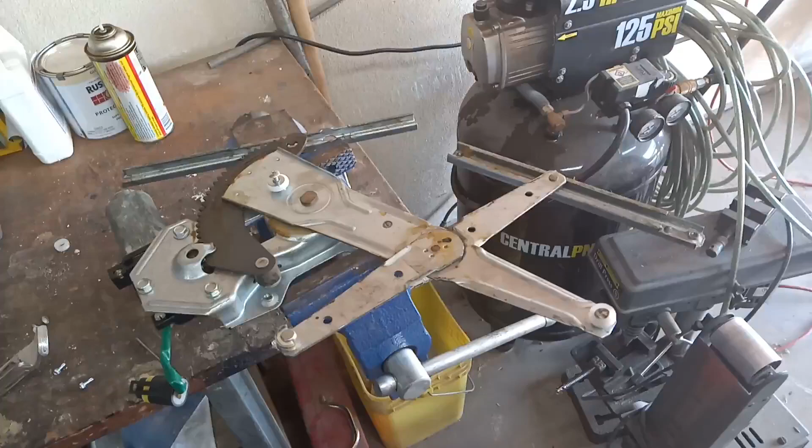I had the driver's rear window on my '98 Jeep Grand Cherokee drop into the door and not roll up. In preceding years, I've fixed the other three regulators, so I know exactly what's going on.

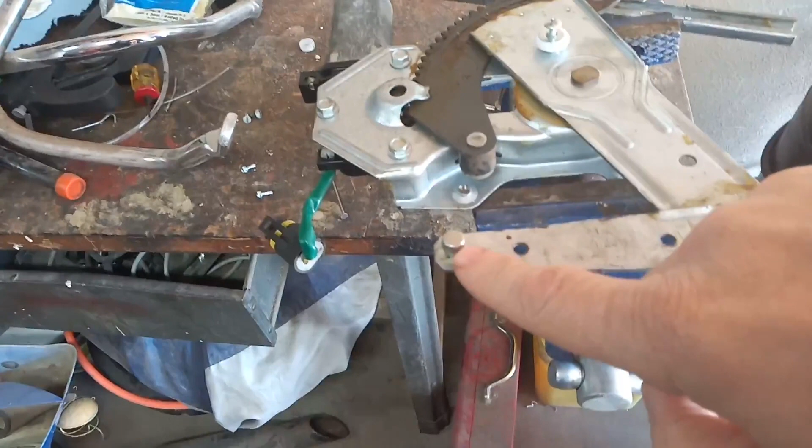Let me show you real quick. There's these little knobs, and you see one here, with a plastic ring on them. That plastic ring, if I can pop it back on, fits inside these channels like that. This is only half of one, it broke in half, that's the problem. Then the scissor mechanism - you can see there's still one intact - lets the window scissor up and down. So those little plastic parts break in half and the window drops in the door.

How I typically repaired them in the past was with these little shower door rollers. Well, they come four to a pack, and I used three in the last pack, and I only have one left, and none of the local hardware stores carry them anymore. I guess it's for something too old, they don't sell them anymore. I could still buy them on Amazon, but you know what, we have a 3D printer, so let's use the thing.

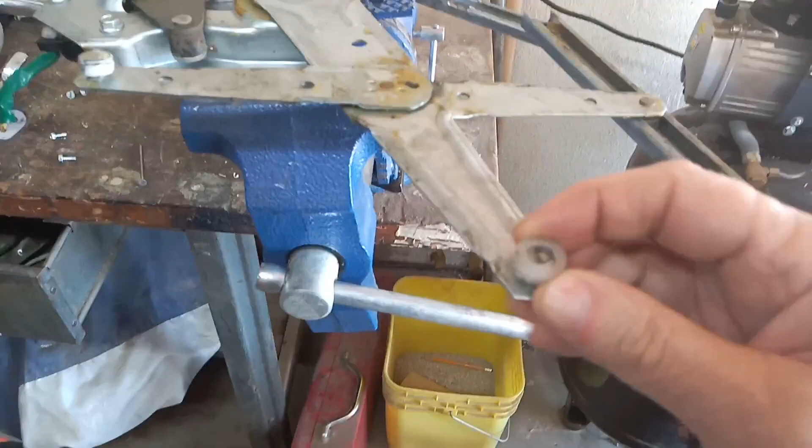So I designed a part, and here is one of my early trials of it. I made this out of clear ABS, heated it and popped it over there, and honestly I think it's going to work really well. I tweaked it a little bit more, but I think that's going to work really well for us.

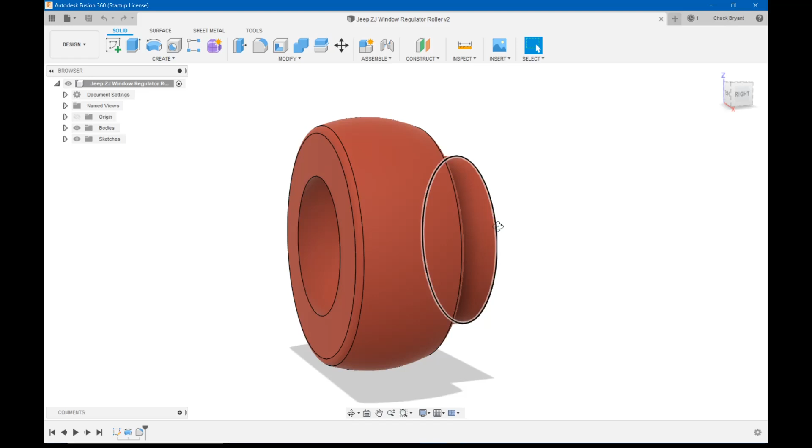Okay, so here's the little part I made. As you can see, it's pretty much very similar to the part that broke off of it. What it is, it's kind of concave in here and convex out here. I got that right, didn't I? Concave and convex, I think so.

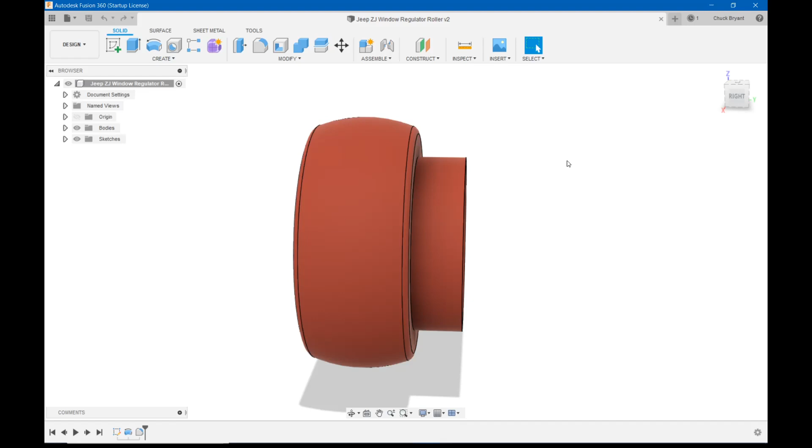One of the things you'll notice on it is this little projection is there to keep that steel ball from moving in that direction. Because I think how they assembled this is that the taper on this side of the steel ball is much more gradual than it is out here on this end. I think what they did is assemble that little steel ball pin into this while it was still two pieces, and then riveted the assembly to the scissor arm. I don't really want to grind those off and re-weld them back on. I mean, I could, but I'm going to try it this way first.

So what I've done is, you can see this little lip here. I've made this part enough bigger that it will go over without this breaking, but it will still give me the function of this spacer, preventing that steel pin from moving through in that direction. I've got some ideas on how. I don't really think I need to do anything on the outside, but I could if I think I need to, but I really don't.

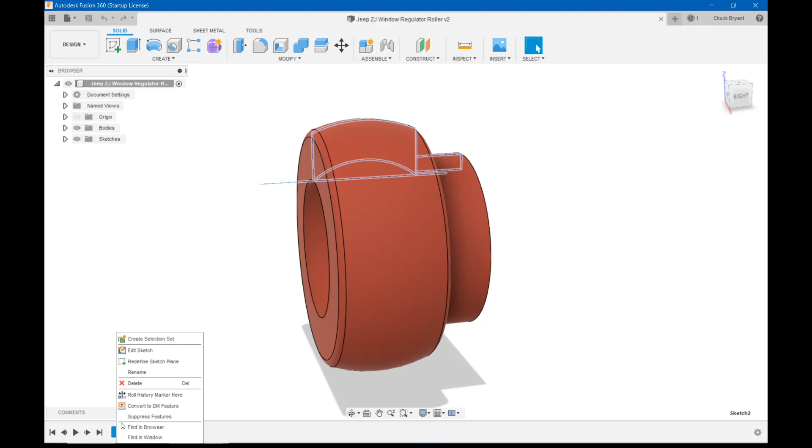So let's take a look at how I made this thing. Let's open up this original sketch. I'm still not used to this new UI in Fusion 360, so I'm a little slower on it than I was with the previous one.

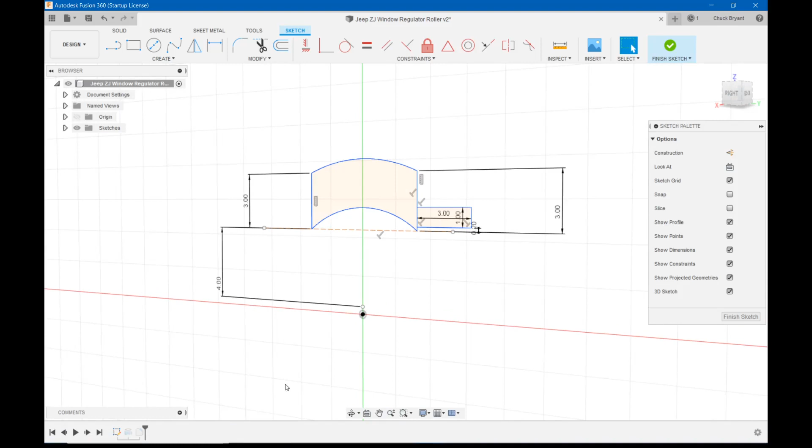So this is what I did. I just came in and free-handed this, and then as I started fooling with it, I started throwing dimensions at it. This is not parametric in any way, shape, or form - like I say, I just started throwing things in it. Then what I did is I used the revolve command to revolve it back into a circle. If we end this sketch and highlight it, you can see the original part there, and then I just hit revolve, and it revolved that all the way around into a 3D part.

And then I started using the measurement tool, and I started trying to measure it to make sure I got kind of sort of the original measurements, and this thing prints in 8 minutes, so I didn't really see any need to do any more than that.

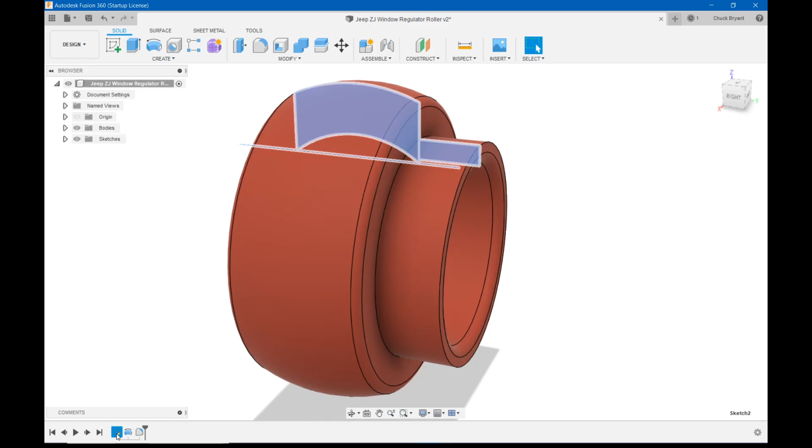I just started printing them, and really I only had to print 3 before I found one I liked. Now, the reason I'm doing this in ABS and not nylon is because the clear ABS happens to be on the printer as it is, the enclosed Ender 3, and I've had very good luck with ABS. It seems like it's really tough material, so I'm going to go with the ABS for this. That window mechanism on that vehicle, especially the rear doors, takes me about 10-15 minutes to pop it out.

So if I have to go back and do it again, it's not the end of the world. And you can get the window to roll up even with all those things breaking, just by putting some pressure on the window to angle the bottom and then bringing the mechanism up. You can catch those steel pins on the bottom and hold it in that position while it rolls up. So I'm going to go with this, and we're going to see how well this works compared to shower door rollers. Let me show you the printed parts I've got done. I know they're tiny, but I'll see if I can get a decent view of them, and then we'll go back out and put it back together. Be right back.

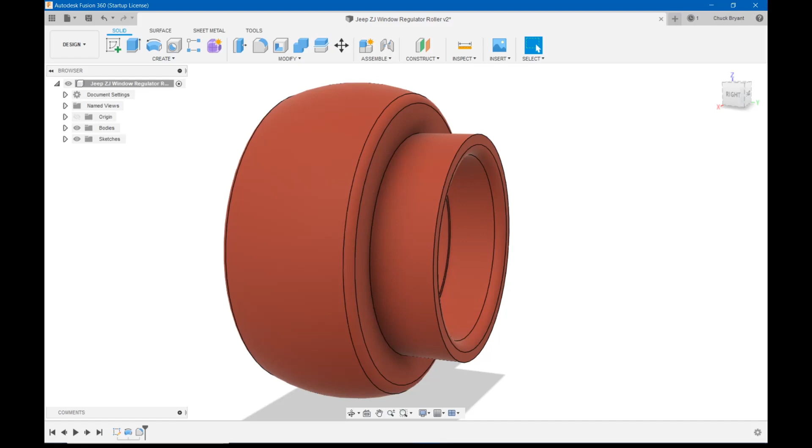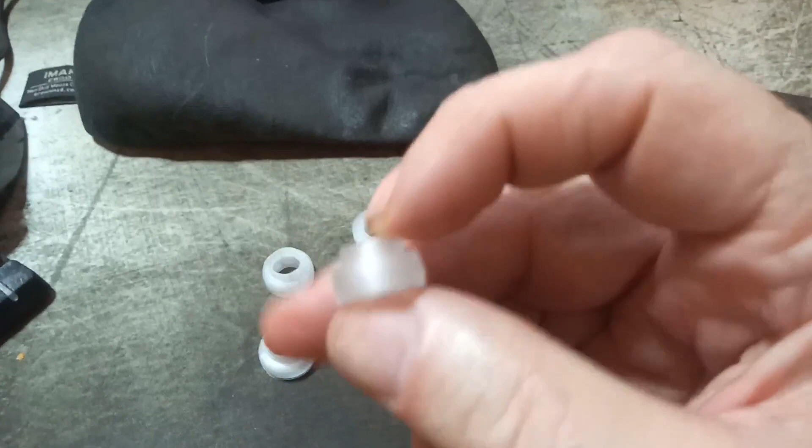All right, so here is the little part, and I am on my phone again, just because this is a quickie and I'm lazy and don't want to set the lights and everything up. When there was a pronounced Z-seam on these, I filed them down to make it smooth, and this is what I am going to try to use to repair that. The stuff is really tough. I took an earlier one and squeezed it with pliers, and it's really tough. So I printed these with my typical ABS Cura profile and with 50% infill.

And let's go out in the garage and let's put these on and see if they'll work for us.

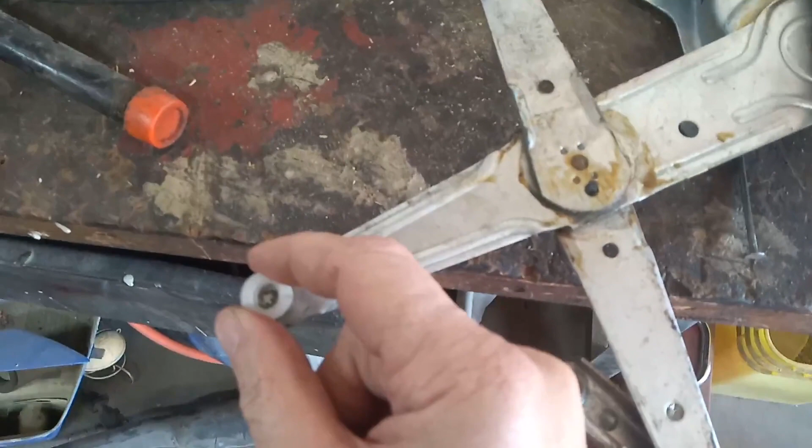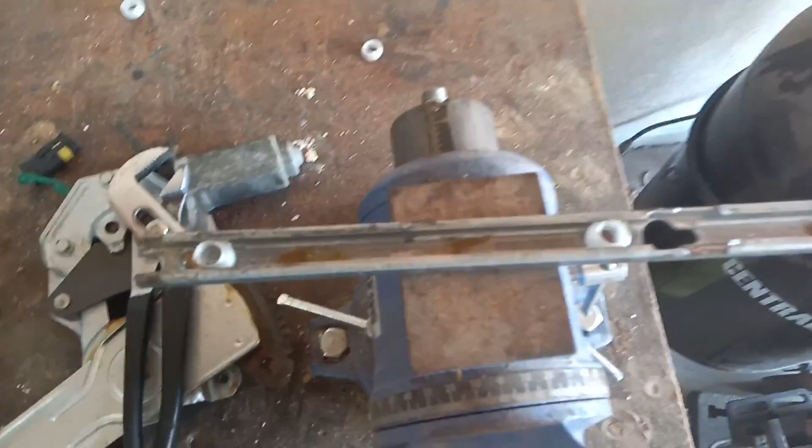Okay, here we are back again. Now there's a couple different ways I could do this. First and foremost, I could do it the way I did my little test piece: heat these up, put them on there, and then use my channel locks to squeeze it over and then attempt to put it in the channel. Or I can slide them into the channel first, heat them, and then attempt to squeeze the pins into it. And I believe this latter method is what I'm going to try.

I may regret it, but you know what, I can always print more of them if I wreck them. And like I say, it's not a hard regulator to get out. So I'm going to pause, go do that, and be right back.

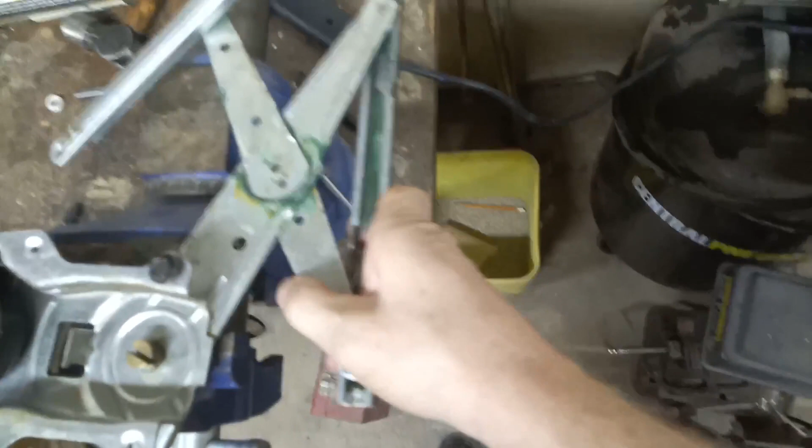Okay, I've got this thing all back together. All 4 parts are on it. Everything's greased up, slides pretty easy. Got a little bit of movement that way as the balls move inside the plastic pieces, but there's very little up and down. I even did this one here too.

This damn thing is incredibly awkward. Every time you try and pick it up or turn it, it tries to scissor closed on your fingers. But you can see, maybe you can see, I got a new one in there too that I made. Can't really see it, but the new one's in there that I made. So going to get this thing put back in, and we'll put it to the test and see if it works and see how long it lasts.

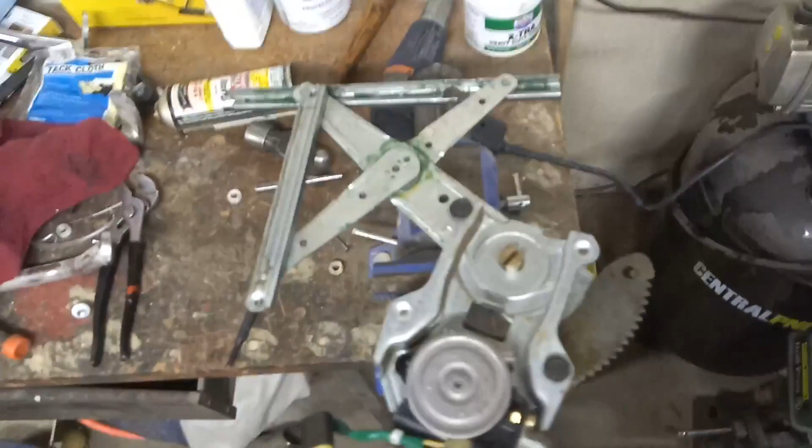Be right back. Okay, here we go. It's all back together. Getting kind of late in the day here. It could use some adjustment, but I want to get back inside.

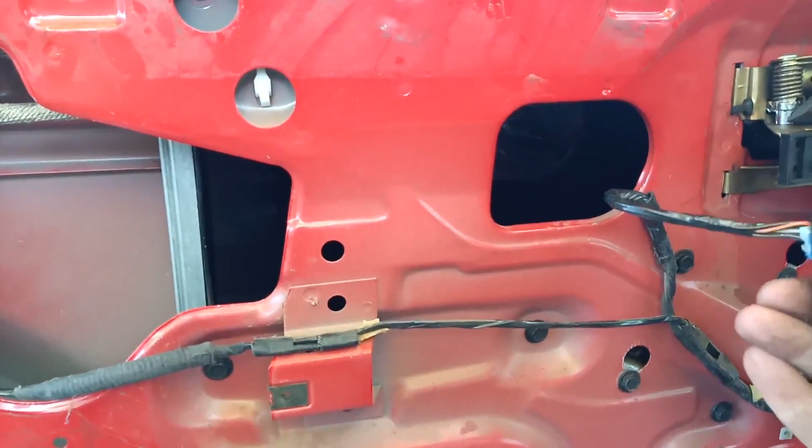Fix the 3D printed parts. Let's hope it holds up.